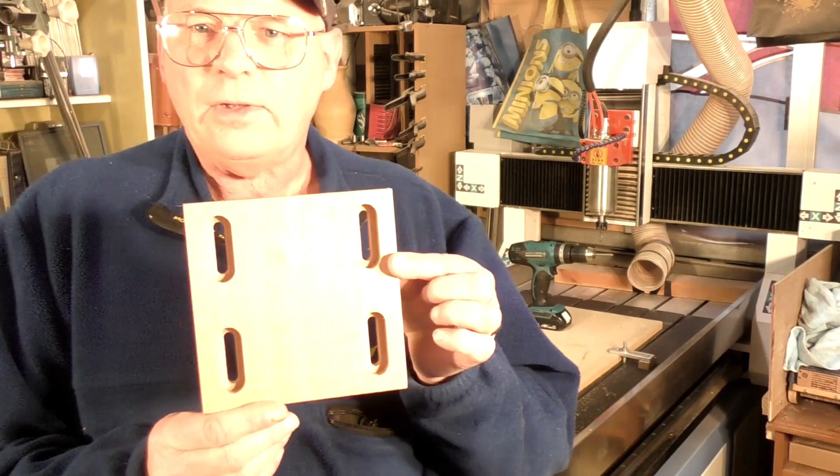So there you have it, the finished item. It's actually going onto a sailboat, so it's a marine bracket. It's made out of oak, and a mate of mine's going to put it on his boat, and he wants to finish it himself, so he wants to varnish it.

So that's how easy you can make it. You can imagine how difficult that would be to make if he was doing it by hand, especially with the rebates in here. So you can see how easy it can be done with a CNC router and Vectric Aspire.

I'm trying a new format with this video. You're going to see the machine operating down in one of these bottom corners where it's out of the way, actually doing the job, and I will be putting this together in Vectric Aspire, running all the toolpaths and drawing up the geometry, and you can see what it relates to, the machine cutting it at the same time. Might be easier to understand maybe.

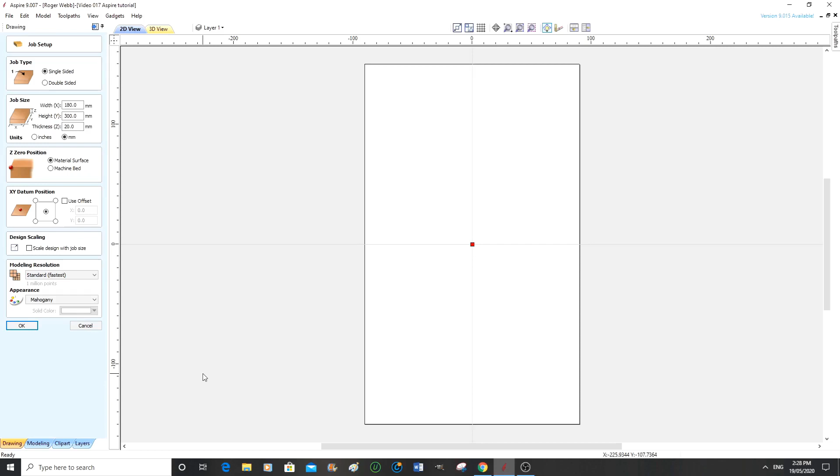Today we're going to do a Vectric Aspire tutorial and a CNC routing tutorial combined. So we're going to draw the part up and cut it. First of all, this is the opening page of Vectric Aspire. So I'm going to set up the piece of work.

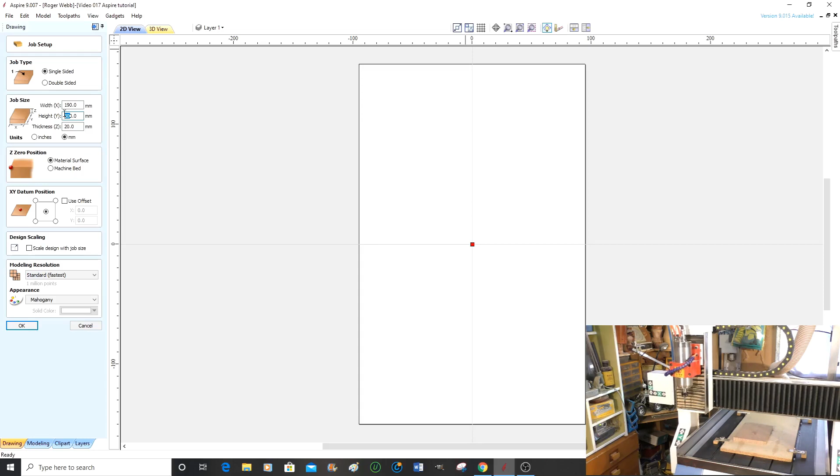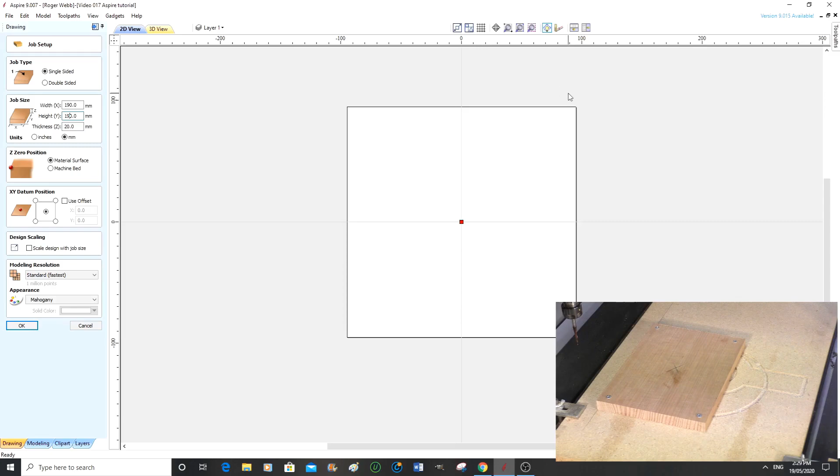It's a single-sided job, and we're working in millimeters today, so we've got millimeters selected, and our material is 190 millimeters by 190. So that's X 190, Y 190. Nice bit of square block material. However, it is a bit of a plank, and I'm going to have a screw in the extended material here, and here, screwed directly into my wasteboard.

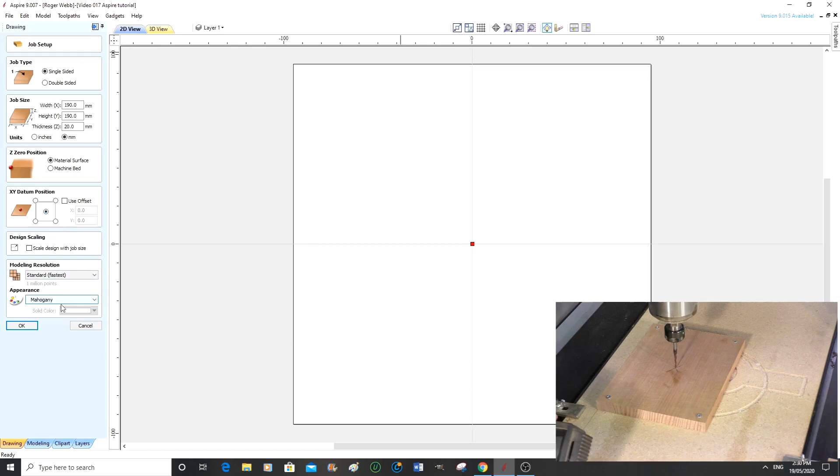I always work with the material 0 at the top of the material, or the top of the block. In this case I am choosing the center. Normal routers would choose the front left hand corner here, but for this particular job I need it to be in the middle, and this is okay. Mahogany is okay, so I'm going to press OK.

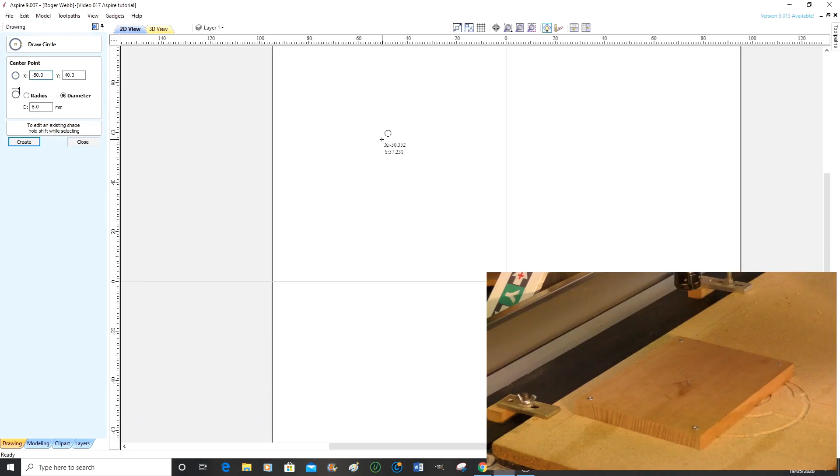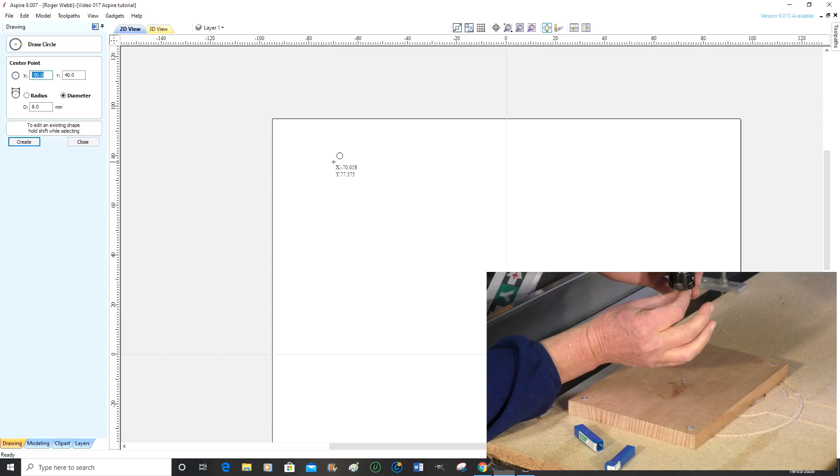So we're going to start to use some of the drawing tools now, and we're going to pick a circle. Let's zoom in on this a little, because my circle needs to be 70 millimeters, and you'll notice that the numbers are actually coming where you see the cursor. The numbers tell you exactly where you are. See, 80, that's 40, there we go, that's where we want it.

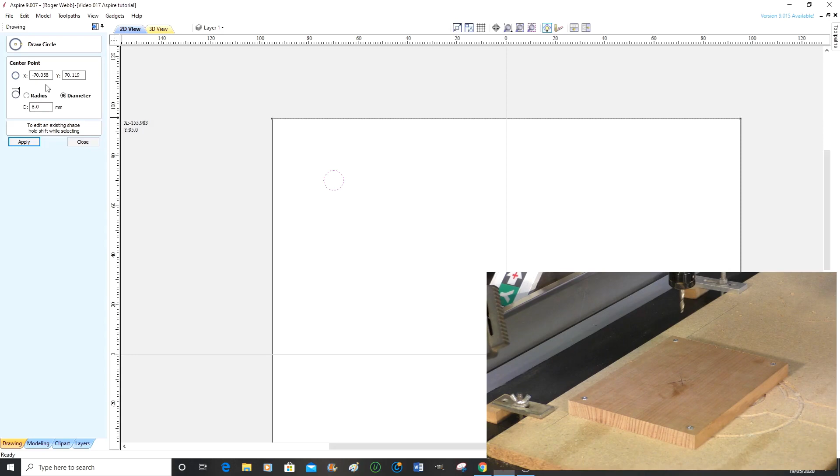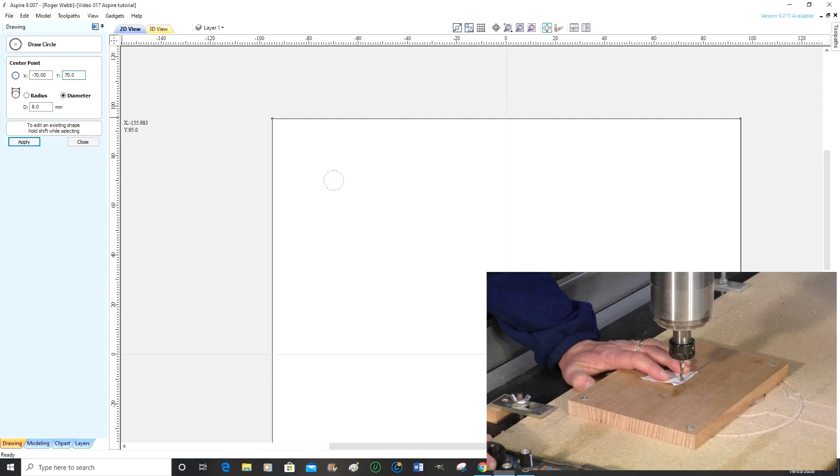70, 70, the center of the hole, and we want an 8 millimeter hole, so we can come over here, and it's already snapped to 8 millimeter, which is lucky. I always work in diameter mode. I don't have to times anything by 2 then. So it's 70 by 70, and that will put us exactly where we want it onto the material there. So we're going to apply and close.

Then we're going to draw another circle, and this time I want this to be 20. What I'm doing is going to draw a slotted hole. 8 millimeters, that's okay. So this needs to be minus 70, 40, apply, and it'll jump into the right spot then.

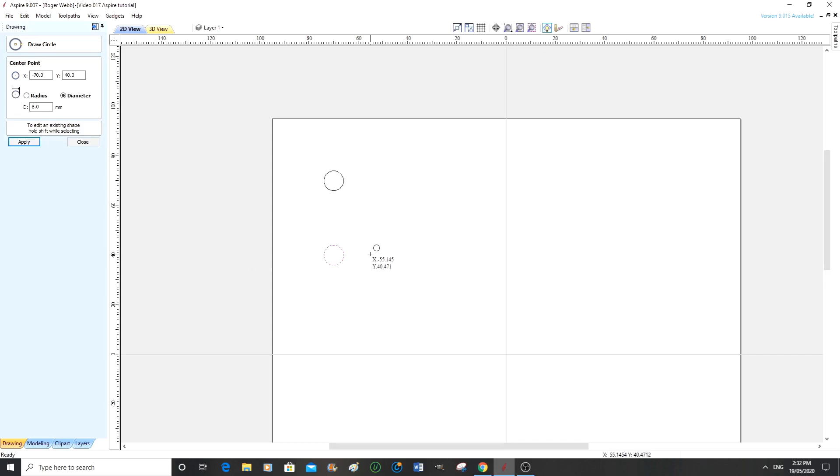Excuse the cat in the background if you can hear him crying for his dinner.

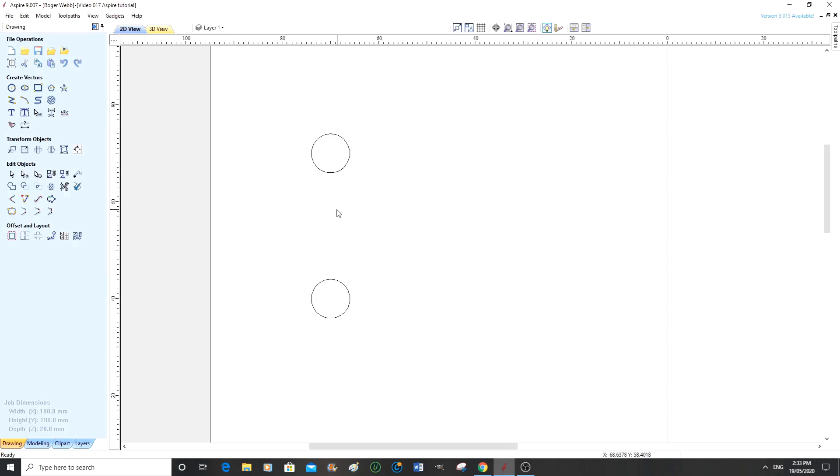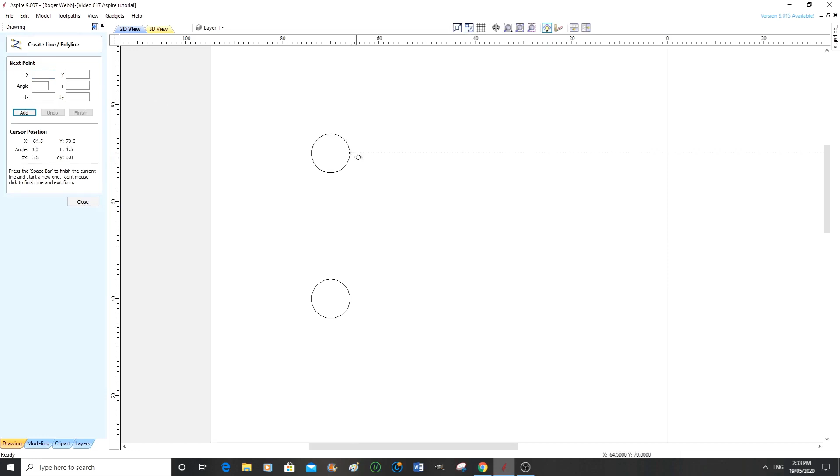So I'm going to close that, and to deselect that you just come anywhere on the grey here and left click. We'll zoom into that a bit more, and now we're going to this polyline. If you notice, I have snap turned on. You have these lines that'll come out, and you can turn snap on and off just by going up here. In this case we want snap turned on, and we want to snap to there, to here, over to here, and it reads out the dimensions all the time of what you're actually doing. And to finish drawing that line, you just right click.

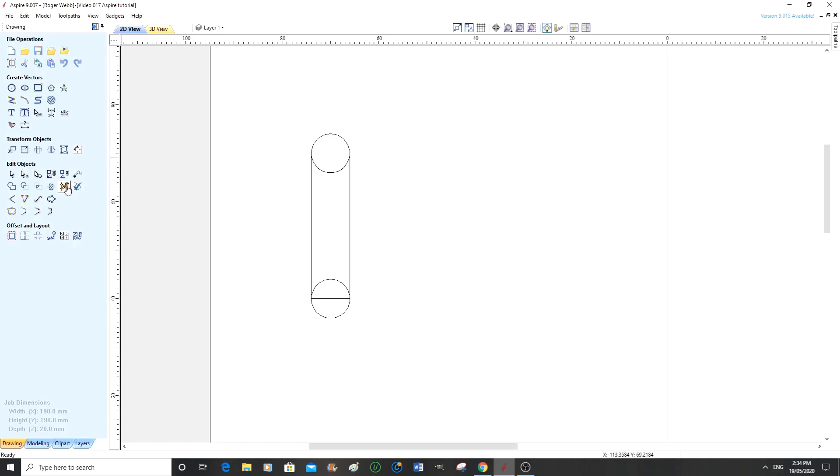Okay, so now what we want to do is to snip away some of the vectors. Any mark or line on your drawing pad here is a vector. So we come here to the snipping tool and just snip away at the lines we don't want, and we are left with a slotted hole.

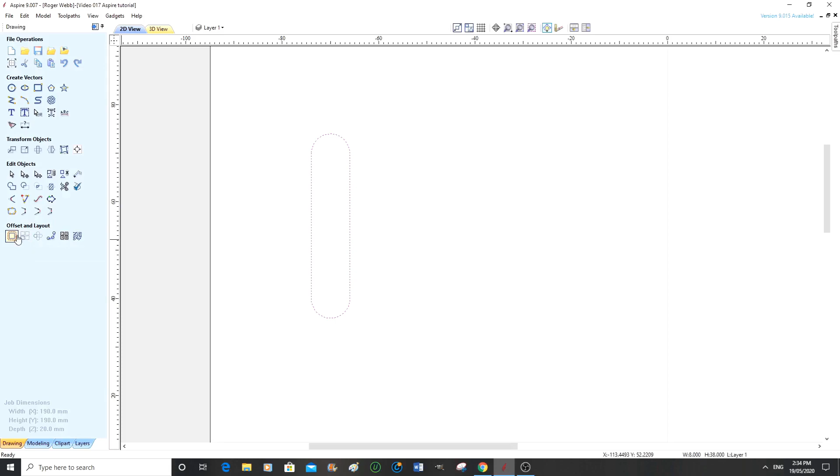So what I need to do now is select that slotted hole, because first of all we're going to offset, because I want it to recess a larger hole on the outer side of this, and we need it to offset 5 millimeter.

So this hole on the outer side is going to be machined out for a depth of 10 millimeters, and then this one gets machined all the way through. So the head of the hex head bolt is recessed down in here with a washer on it as well. So we have a slotted hole with a bolt through it, and we're actually making an adjustable plate so we can close that.

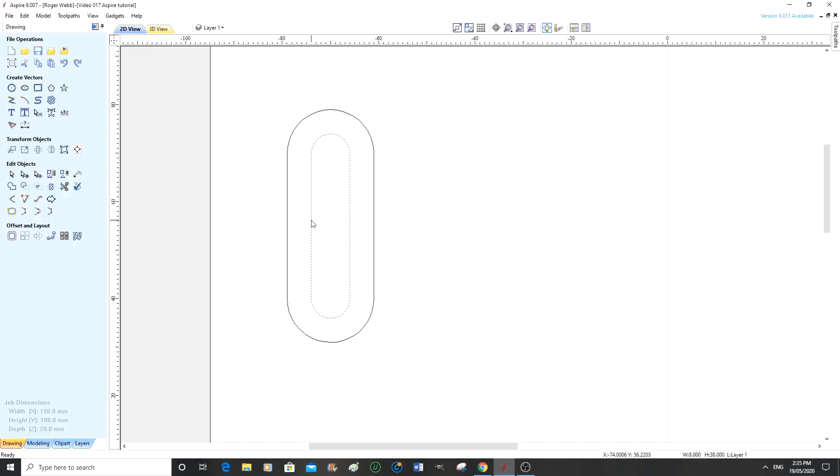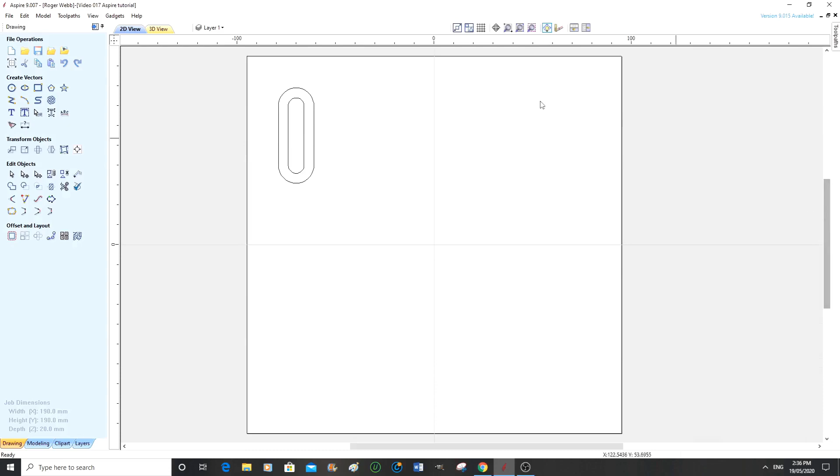Now to select multiple objects like this, you just go and select that one, then press down the shift key and select again. So we've selected the two. Now we're going to zoom back out of this, and let's get this into the middle here. Select, shift, select.

So now what we're going to do is make an array copy. What I want to do is position 4 of these in identical area on this piece of material.

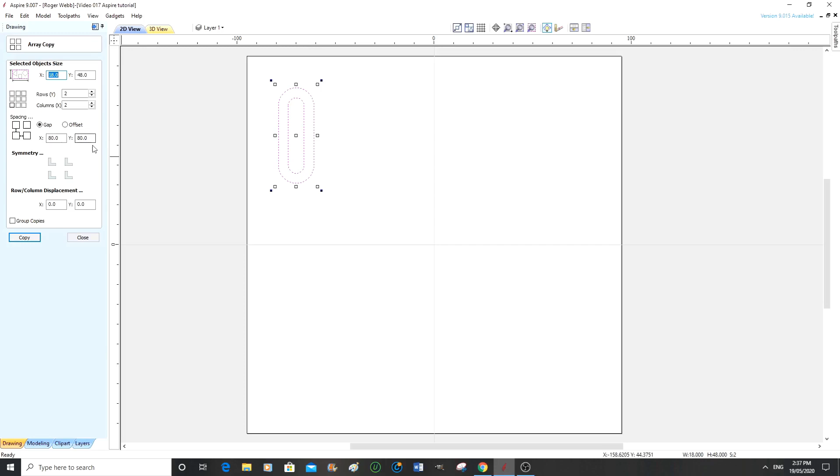80. Oh, I think I know what's going to happen here. What's going to happen if I press copy now, this is going to make an array copy up around this way, and I should show you why. Oh, there you go. And it's also not spread far enough apart. So we're going to undo that.

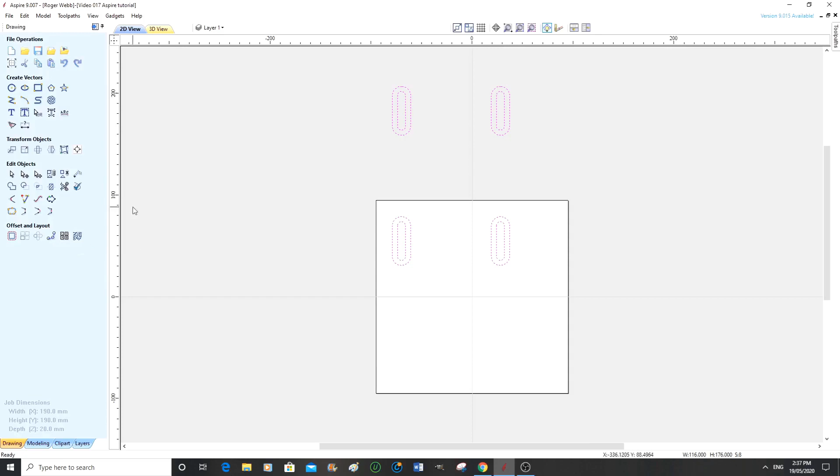In actual fact, this needs to be moved over a little bit. So I'm coming out of this, and I'm moving this over. Let's zoom in again, and to move it over, just use the arrow keys. I'm coming over to the 60 millimeters, that is the center of this, which is fine, and I actually need to go down a little bit too.

The center of this is not exactly where we want it, so I want to move it back down a bit. Top of this hole needs to be.

Now, to guide me a little bit more, I want to deselect that a second. So, I want to draw another square here of 150 millimeter by 150. This needs to be 0 and 0. So that's going to put that right in the middle.

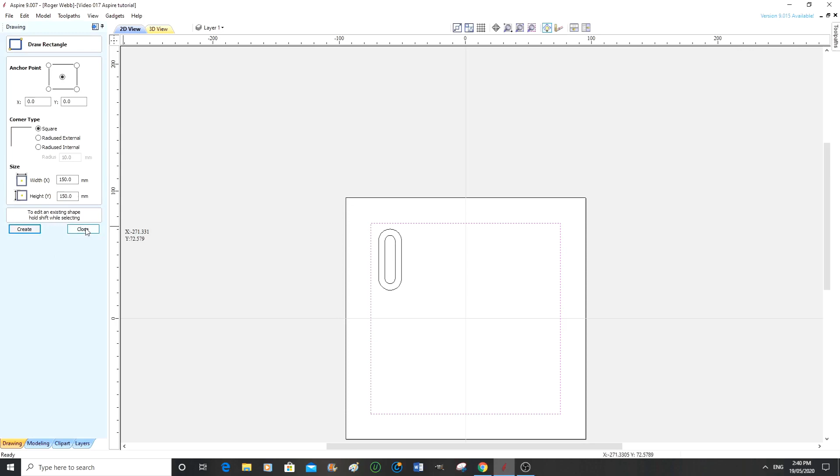There it is, as I expected. Now this is the outside of the part that I want, and I was a little unsure of actually where I was going to position this. I'll apply that and close, and this is the actual size of material that I have available.

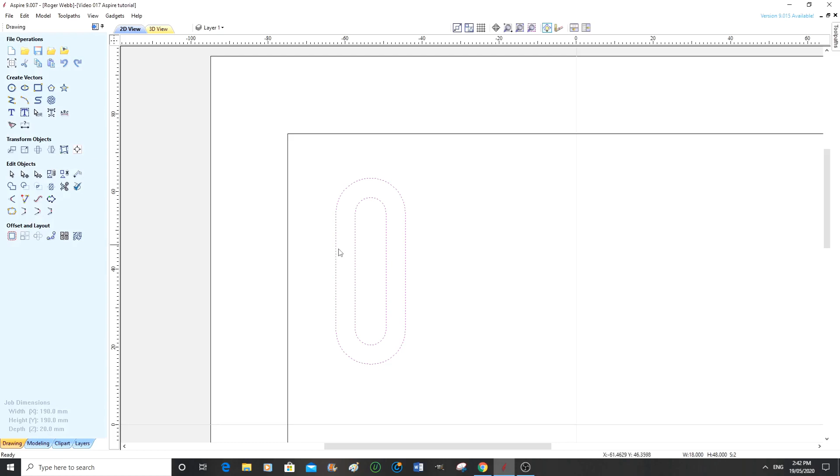So we're going to put this now in an area that makes sense. Okay, to find out exactly what size that is between there and here, there's a technical way of doing it, and that is by using a ruler.

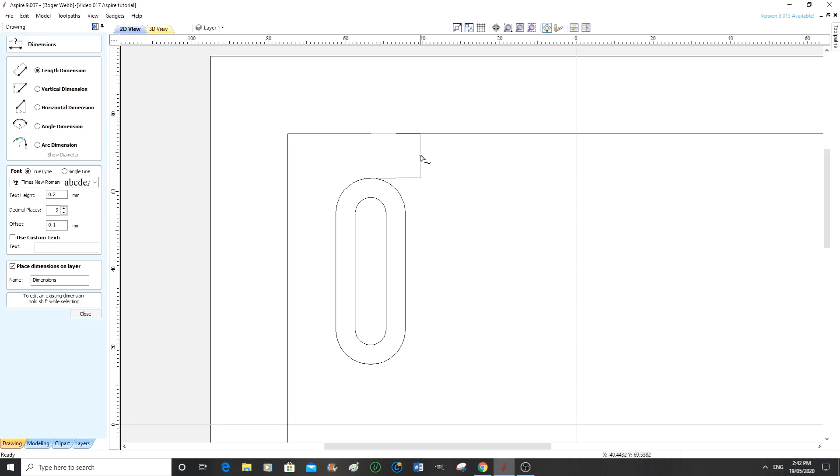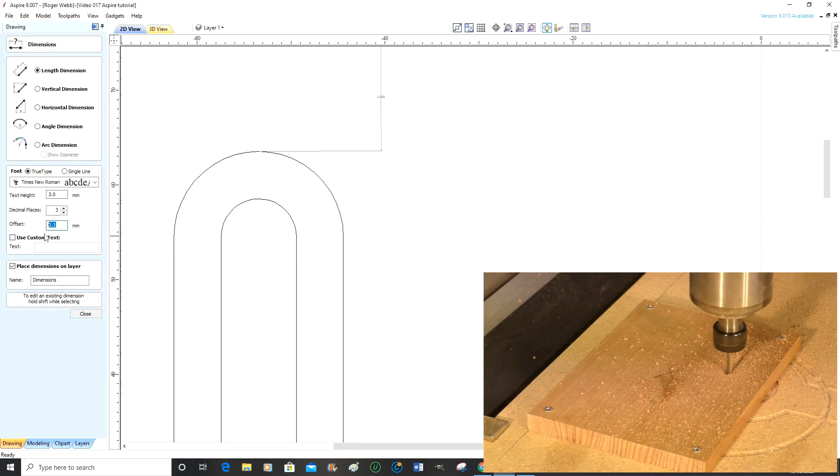Dimension here to here. What is it? Okay, that's a little bit small. Actually, we should be able to make that a little bigger. Text height, here we go. I think we ought to make that about probably about 3 millimeters. Let's give that a go. So we'll come back out of that and do that again, because that was very, very small.

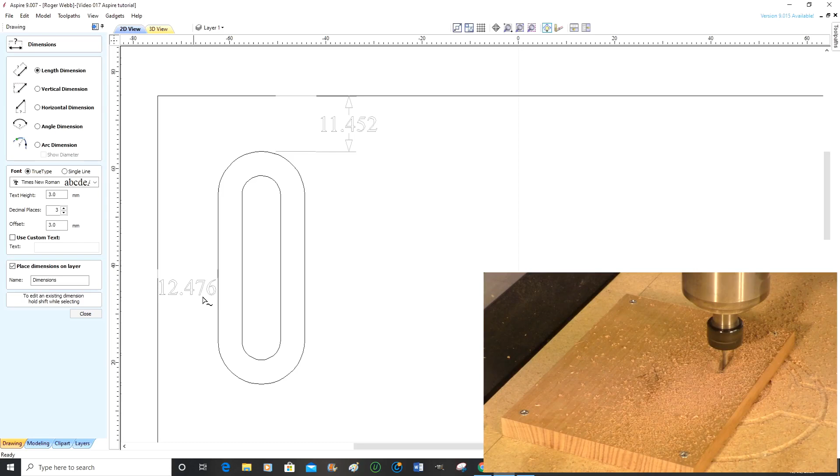That's better. Okay, so we need to move this. Let's find out where this is first. Okay, so I actually want 12 and 12. So we're going to close that. Let's select. So that, you know, it needs to be sort of near to 12 millimeter.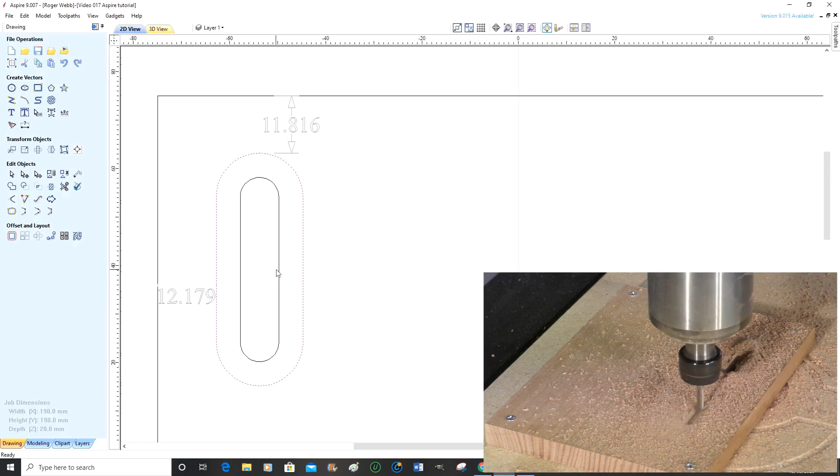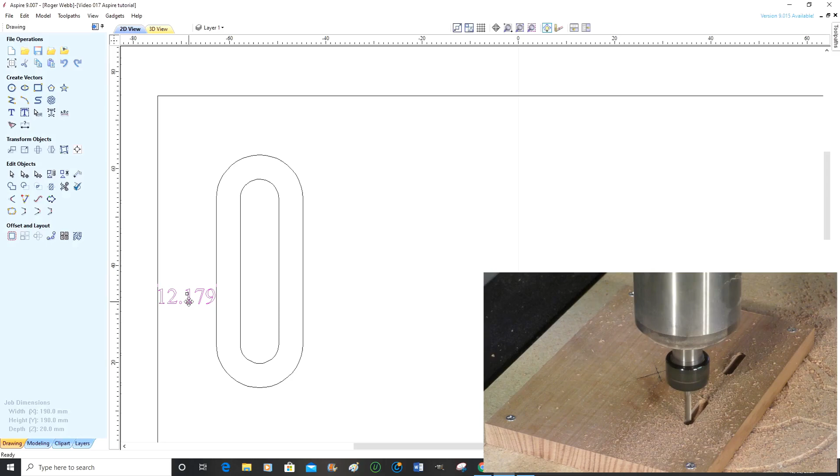That's good enough. We're talking about a bit of wood here. 11.8. This needs to be increased just slightly. Okay, so I can close that. And what I'm doing here, I'm showing you several different things - how to put measurements on your drawings as well. So I just want to go down one slightly, and if you make a mistake with the measurement, you can just highlight it and cut, and it goes away. There we go. Okay, so this one now is in exactly the position where I want it to be.

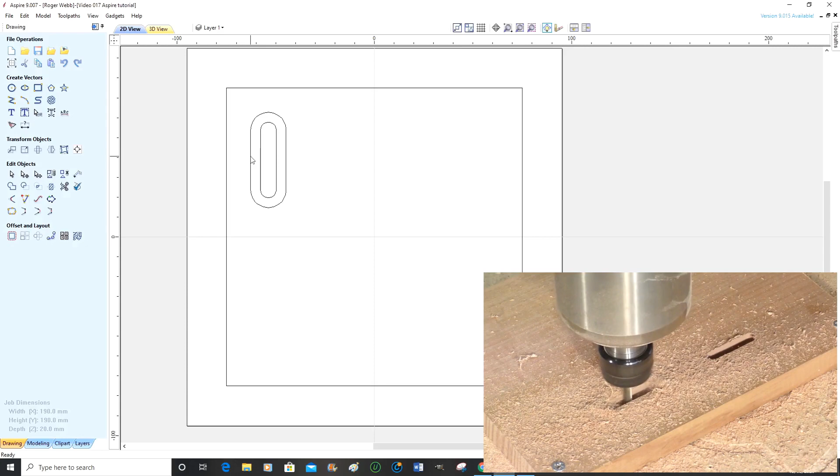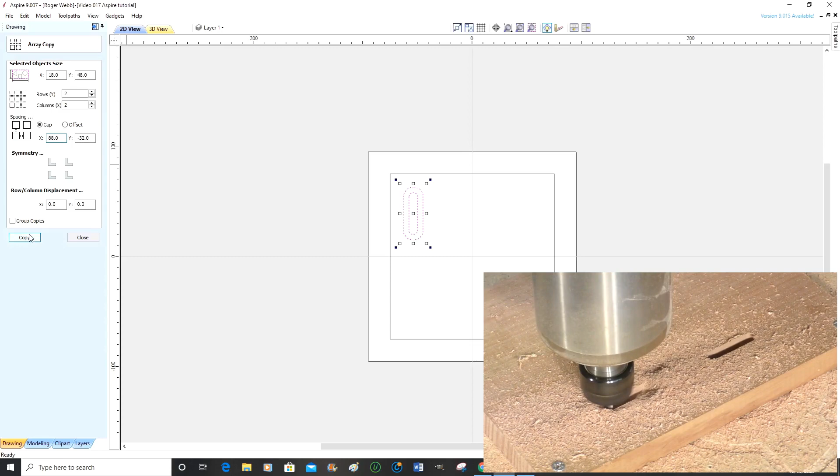So now I need to make 4 copies of these in identical places. Just press the shift, select those 2. Now we want to make a copy. Now the measurement between the center of this one and the center of this one, if this is 150, and of course after working it out, the magic figures are 88, and minus 32, and it gives us an exact array of what we require. So we can close that. Absolutely beautiful.

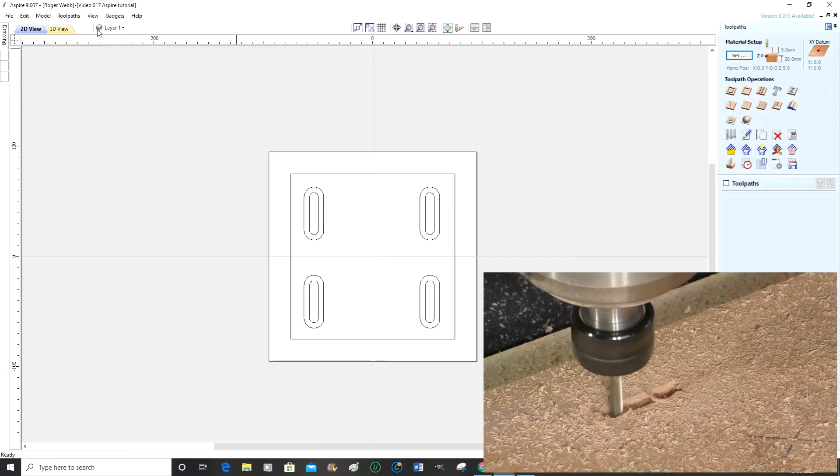Okay, so now we can switch to the machining out. We're going to do 3 operations here. So first of all, we're going to select all the inner ones, with the shift key pressed down. Okay, and in this case it's a pocket, and we're going to select a 6mm end mill. Although it's an 8mm hole, we're going to use a 6mm 2 flute.

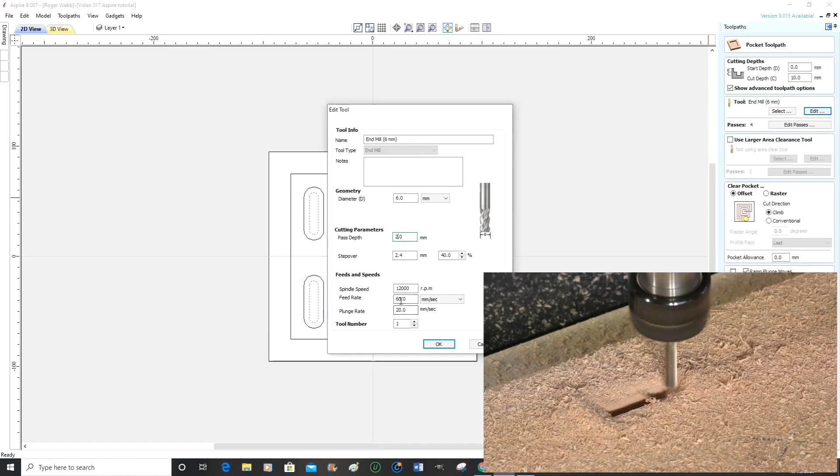I don't like to stress it too much, going into quite dense oak. That would be stressing it. So I think 30 millimeters a second... actually I'm going to do 20 millimeters a second. That's fast enough, and I usually put the plunge rate at 50% of that.

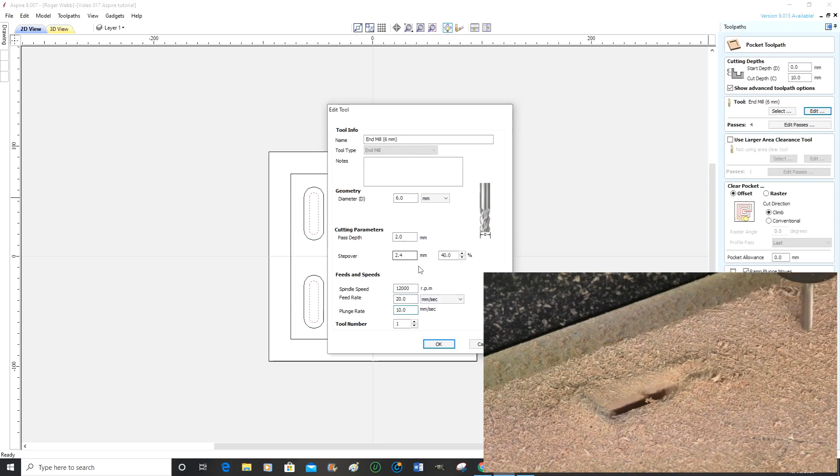Step over is okay, we'll OK that, and we're going to be doing climb milling. I always prefer climb milling, it just seems to give a better cut. Ramp in moves, start off distance 5mm. I always like to use ramp in moves too.

Pocket 1, and calculate. Okay, I won't bother with this at the moment, we'll do that at the end.

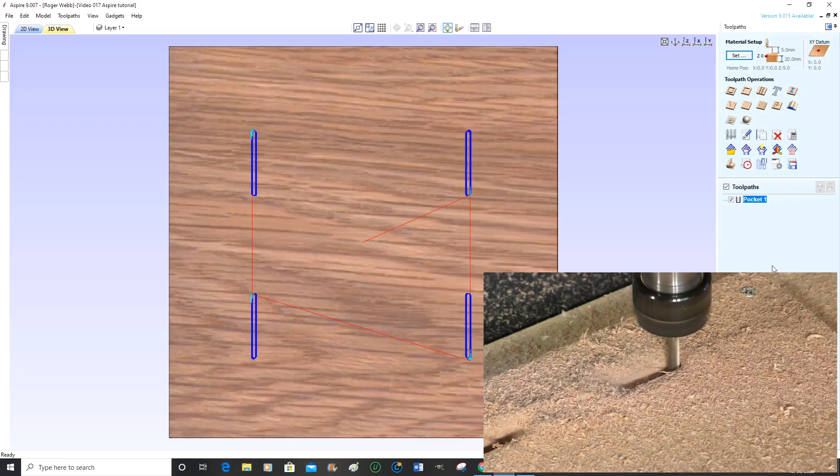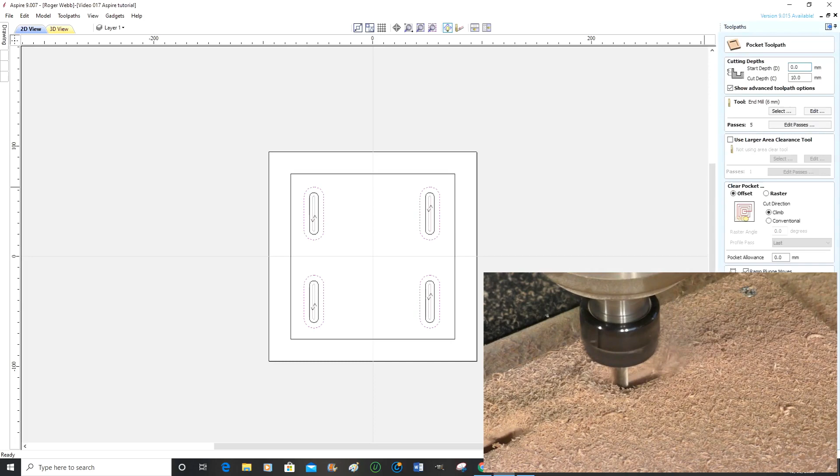Back to 2D to know what we're choosing. So now we'll choose the outside, the 4 outsides, and it's another pocket. Before we do this, let me just check to see how far the depth was I went in. I actually want to go all the way through, and I didn't really check that.

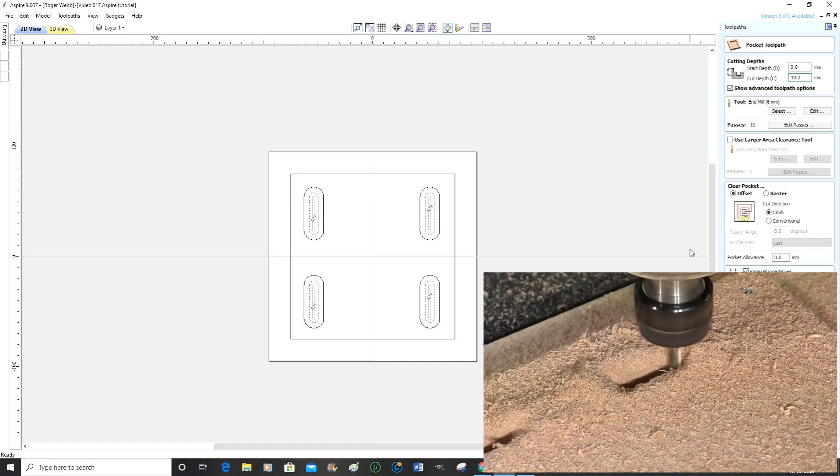Aha! That's got to be 19 mil. Okay, close. Back to 2D.

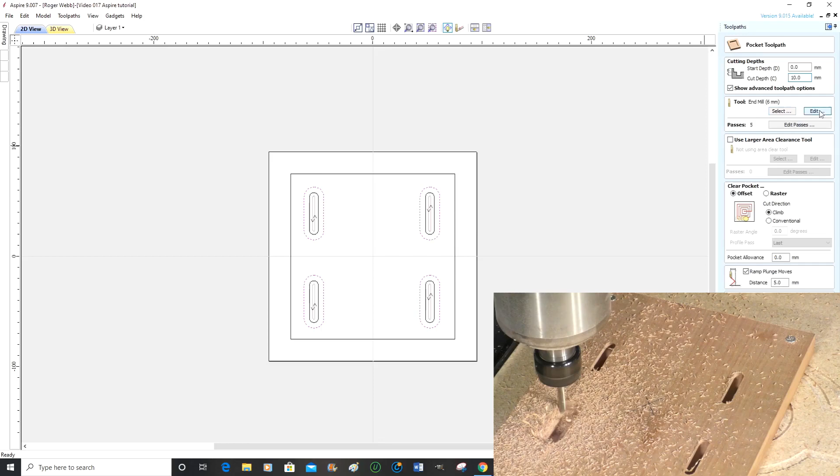Another pocketing operation. I'm going to be using the same tool, so I'll change that to 19mm. Parameters are all still the same, that's okay. Pocket 2, calculate. Cancel that for the moment.

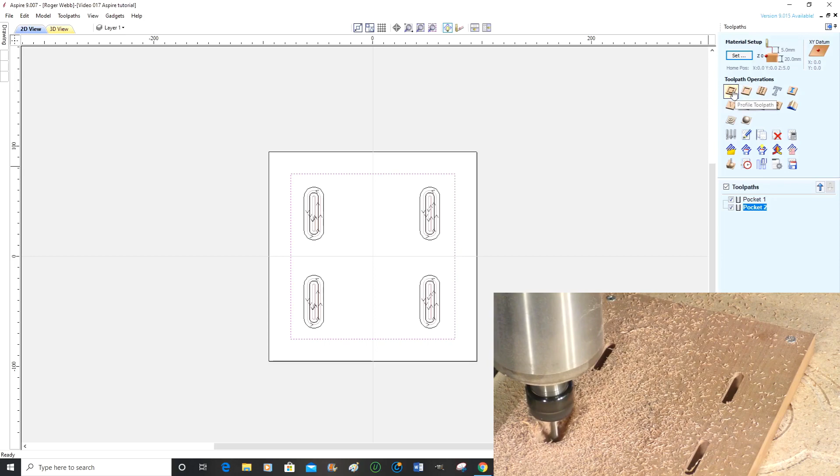Back to 2D. Now this one, I don't think I've shown you anything like this before. Now we're going to be doing a profiling cut. We want to go all the way through. We're going to be using a 6mm.

No, that's a little bit fast. If you go too fast, it could make it a little bit ragged. Although in Mach3 you can alter this number - you can run the whole program a percentage of this, 80%, 50%, whatever you feel like. So you've got some control over it.

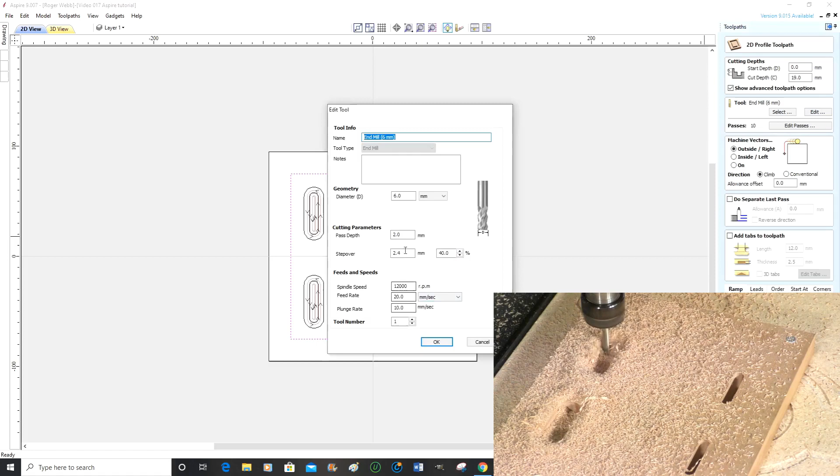Okay, all the way through, just have a look. Did I say that right? Yep, that's okay. 2mm depth of pass, yep that's fine. Now then, here we go, add some tabs.

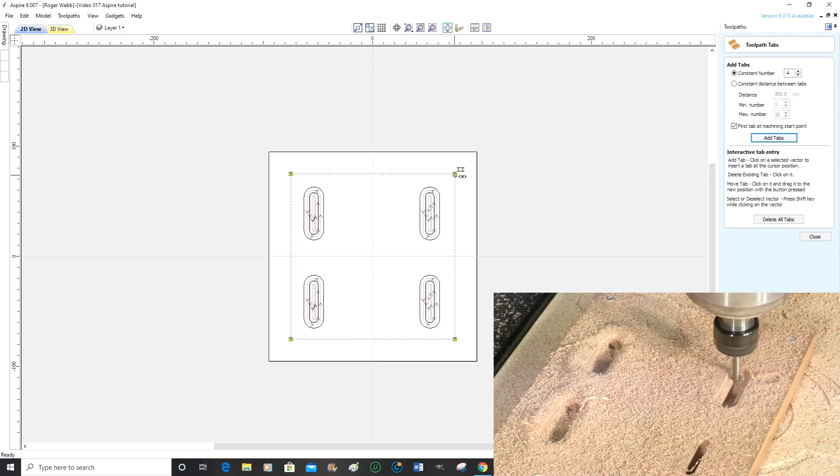Well, 4 - I want to add the tabs. Okay, so now we want to put the tabs where we want them. So I'm just going to move that one to there, this one to here, this one to here, and this one to here.

Because it's a fair bit of meat here, the grain will be running in this direction, and I don't like it on the corners. It makes it difficult to cut them through and clean them up. It's much easier to cut them through on the long side - we're picking up the long grain here, across the grain there, and long grain here.

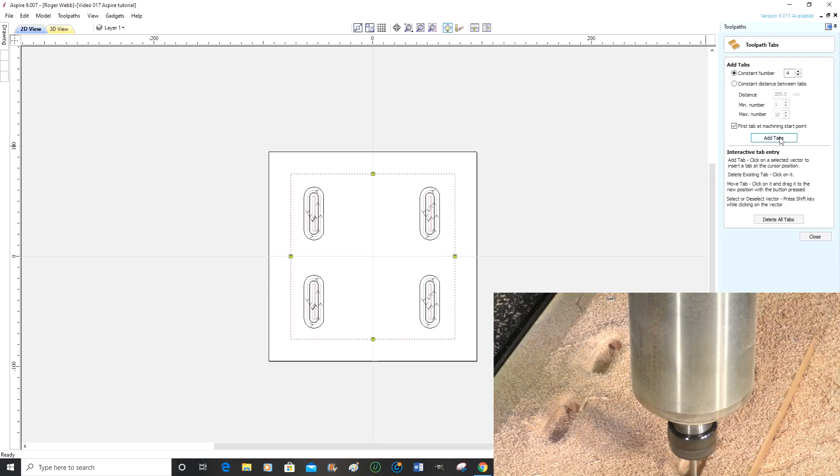So add tabs - oh, it didn't like that, did it? Okay, if you have this ticked and say add tabs, it will jump back into the corners. This is something I didn't notice just now - you need to uncheck that if you want to put the tabs where you want them.

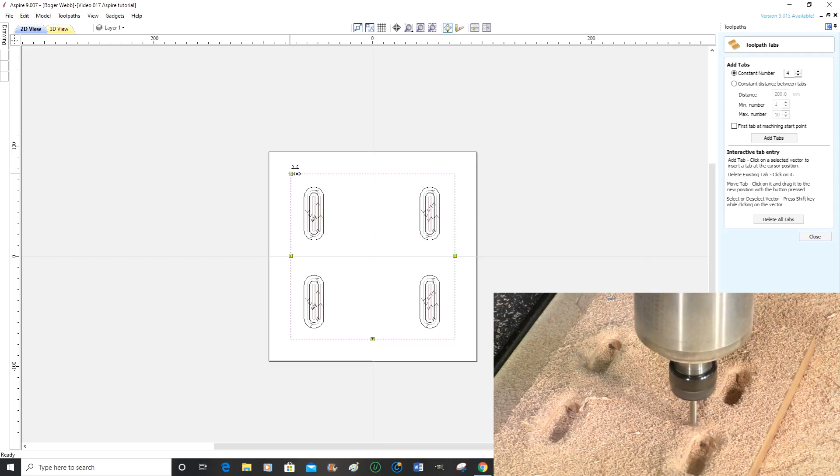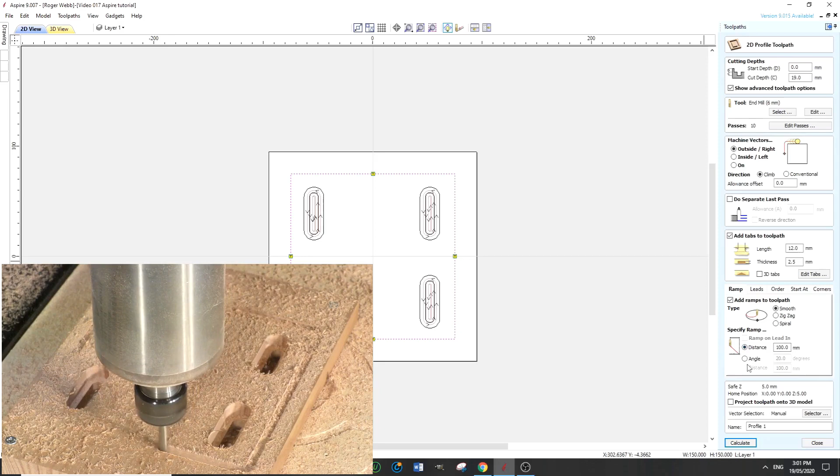Okay, add the tabs, and they're there to stay. Close. Ramp moves, yeah, 20-degree angle. You know, I'm not even worried about that, not for this job. I've slowed the plunge rate up enough, and I've got tabs there. This is all okay. So it's profile 1, calculate.

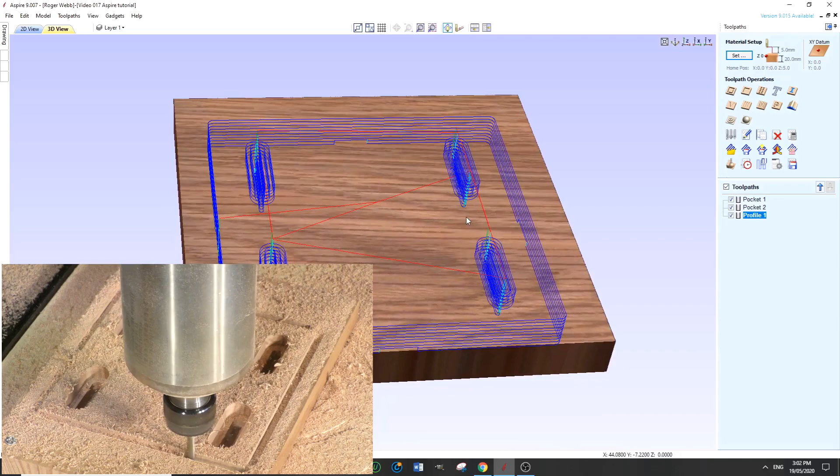Okay, so let's roll this over just a little, and we'll have a look at all of them. Let's slow this down a little. There we go, you can actually see them going through here.

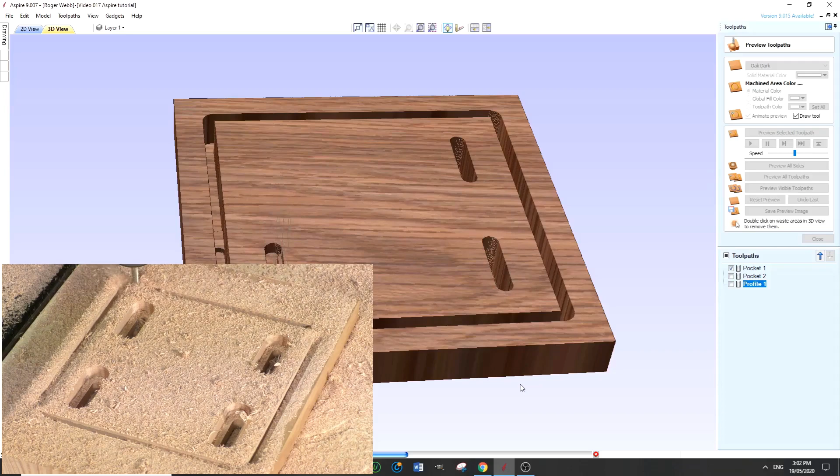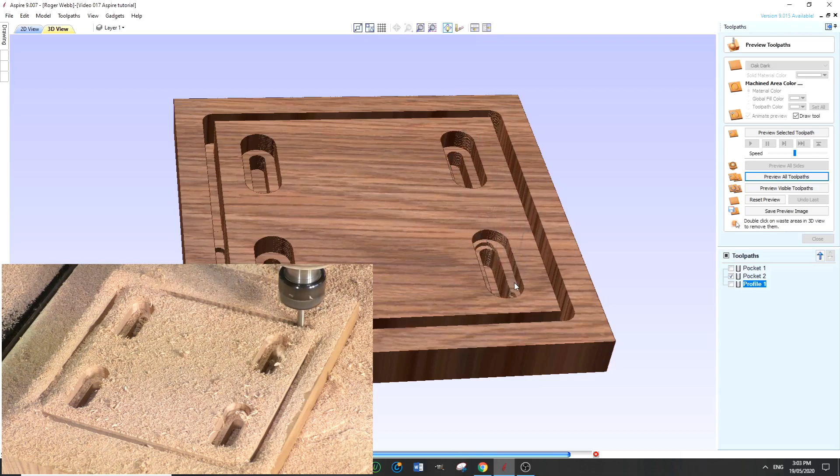Doesn't appear to be going all the way through, do they? So let's have a little look here. I think it's leaving a very, very small skin on the bottom. Well, we're going to check it out now. Okay, let's have a look at our profile.

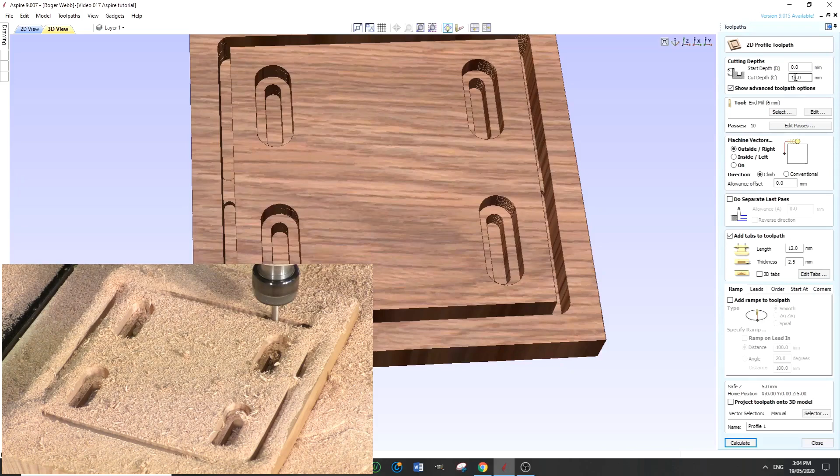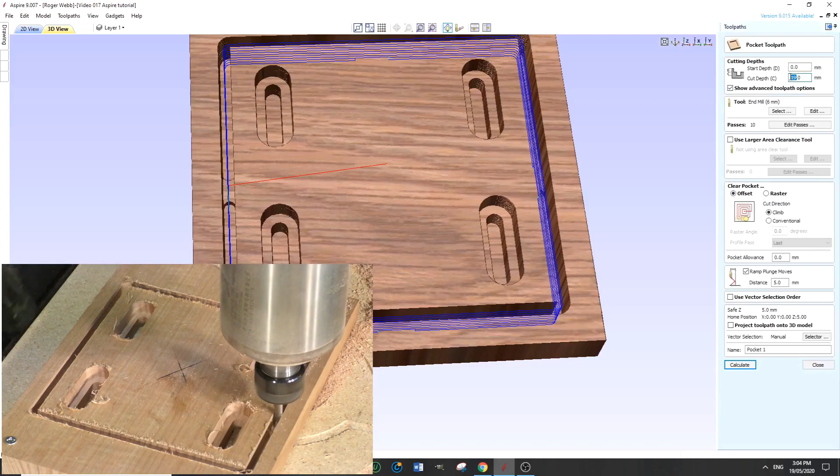I'm actually going to change that to 20mm, and recalculate. That's correct. This one to 20mm - it's leaving a very, very small skin on the bottom, so I really don't mind going a millimeter into my wasteboard. Okay.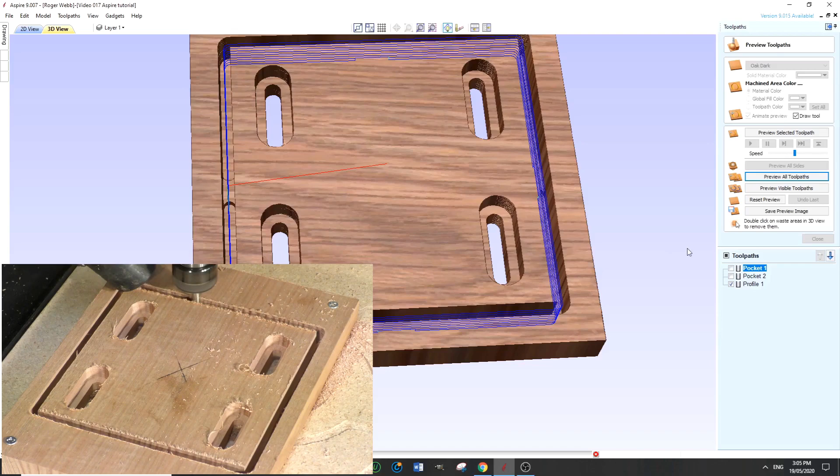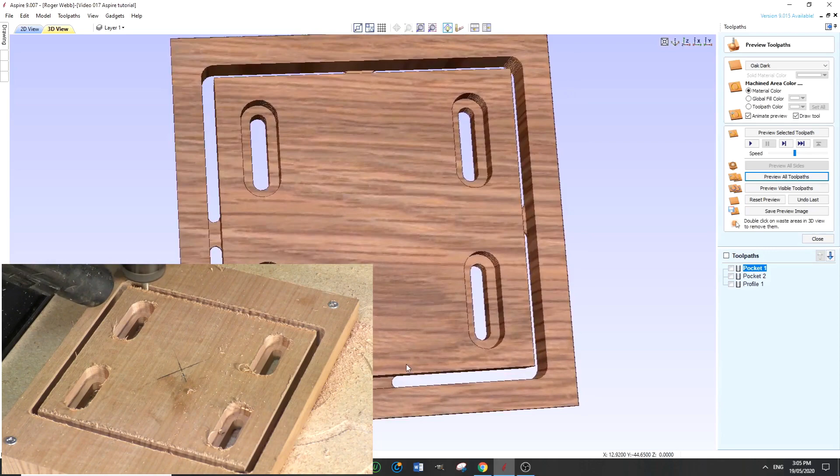That's better, there we go. So having a simulation, you know, it could have left a skin on the actual job, so it's better to sort of rejig things a bit. That's good, that's exactly what we want. There we are, it's exactly what I want.

So you can see it's a plate that is adjustable, that's going to be holding something else.